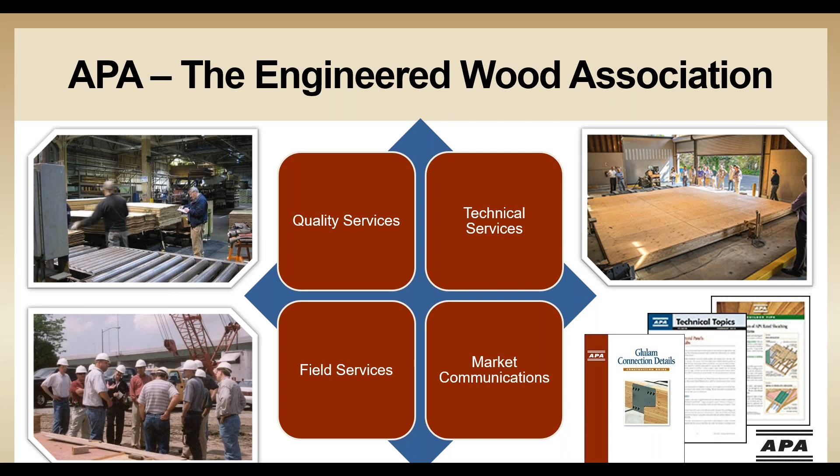Then we have Quality Services, which works with manufacturers to ensure a certified product reaches the construction site. And finally, we have Field Services, which I'm a member of. Our job in Field Services is to connect the dots from manufacturing to the end use, providing education and technical expertise to help get the job done right.

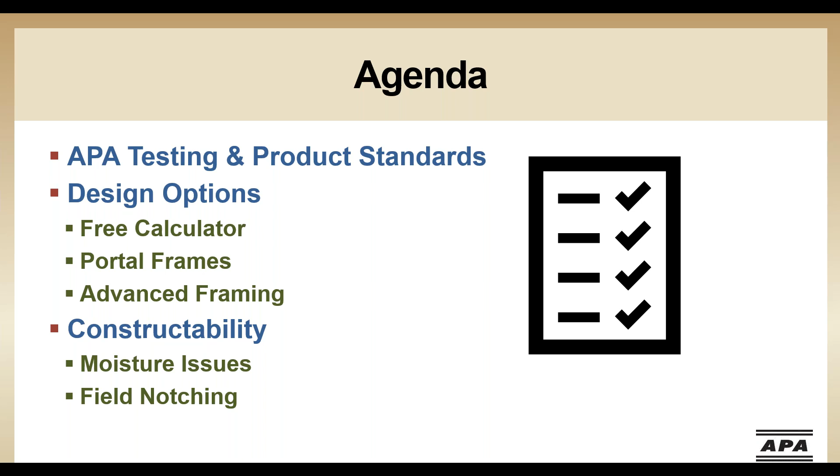Today, we're going to cover some facts and resources available through APA. We'll start by talking a little more about quality services and the testing APA does in our Tacoma lab. We'll also talk about some design tools and options that you may not be aware of, and go over some detailing to help with constructability, and review some guidelines for how to handle a trigger-happy plumber with a Sawzall. APA has a lot of free educational tools, so we'll wrap up by going through a couple different ways for you to stay up to date.

APA works in conjunction with ANSI and NIST to develop product standards for engineered wood products. If you're like I was, you reference these standards in your general notes and project specifications, but may not pay them much attention. Within APA, technical services is responsible for developing these product standards and testing products, while quality services works with member mills to ensure compliance with the standards during manufacture.

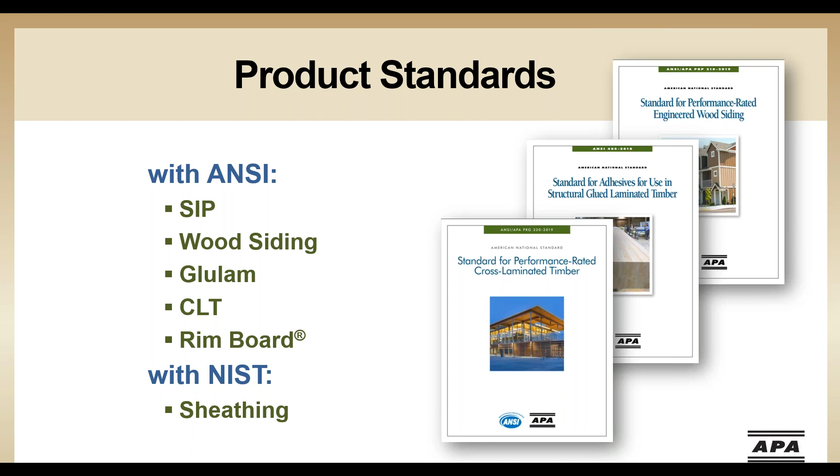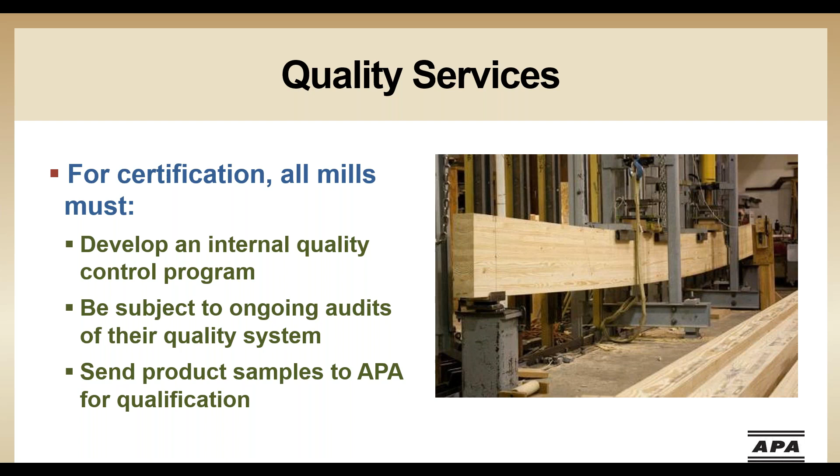The products aren't just used in the US, so APA is accredited by the Standards Council of Canada and the International Accreditation Service. Even though the Technical Service Division in Tacoma does a lot of quality testing, it isn't the only place the products get tested. The Quality Services Division works with each member mill to develop their own in-house quality assurance program, including regular testing and audits.

Part of the mill quality program includes performing their own internal inspection on a regular basis. But APA also performs third-party audits at the mill.

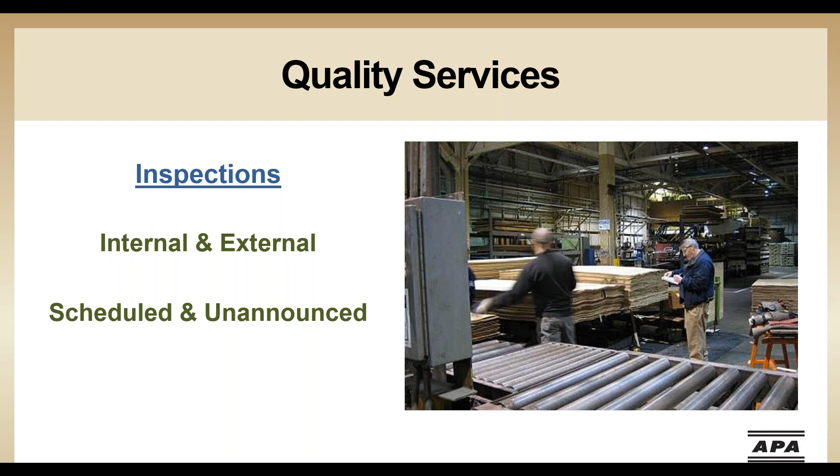I was really surprised to learn that panel products are tested quarterly in the APA Tacoma and Atlanta labs. That's a lot of sheathing tests, especially when you consider that it includes impact load tests of 300 to 400 pounds, concentrated load tests of 400 to 700 pounds spread over a 3-inch diameter disc, and a vacuum pressure soak to test the adhesive bond. One of the reasons the testing is so frequent is because of the high volume of panels produced.

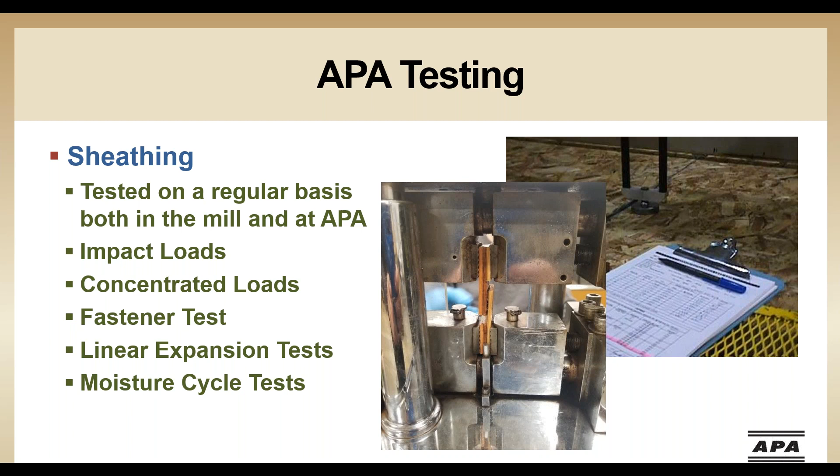I mentioned earlier that technical services backs up their guidelines with testing. APA's Technical Service Division has actually been doing research testing since 1969, but APA recently completed a lab expansion in Tacoma, and the new lab expansion allows for multi-story shear wall testing up to 30 feet tall and full-scale irregular diaphragm testing. When I was last there in January, they were working on testing a new type of shear wall assembly, which was pretty cool.

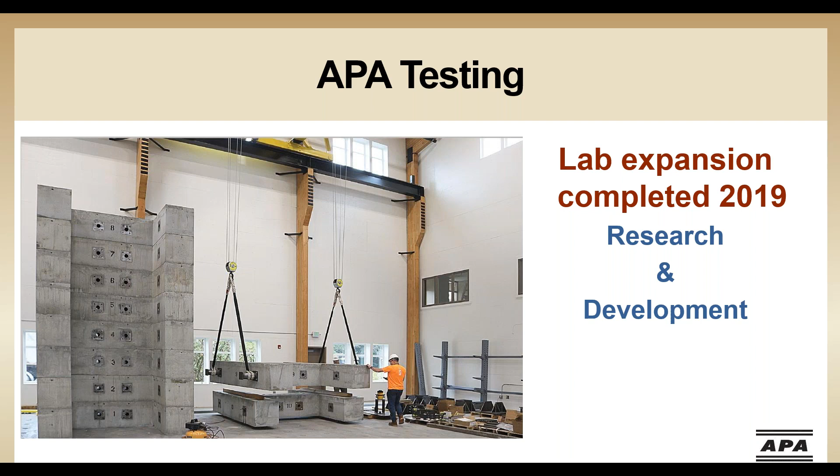APA research generally centers around wood systems innovations and building code development to advance the capabilities of wood frame construction.

Moving on to design tools, the FTAO project is an example of how field services and technical services collaborate to solve a problem identified in the field. One of the tools developed by APA is a free spreadsheet for designing force transfer around openings in shear walls. I used to do this by hand, super tedious.

Several engineers I've talked to have created their own spreadsheets, but if you haven't, this tool is ready to go for up to 3 openings and asymmetric piers. The spreadsheet is completely transparent, so you can see all the formulas, even if you can't edit them.

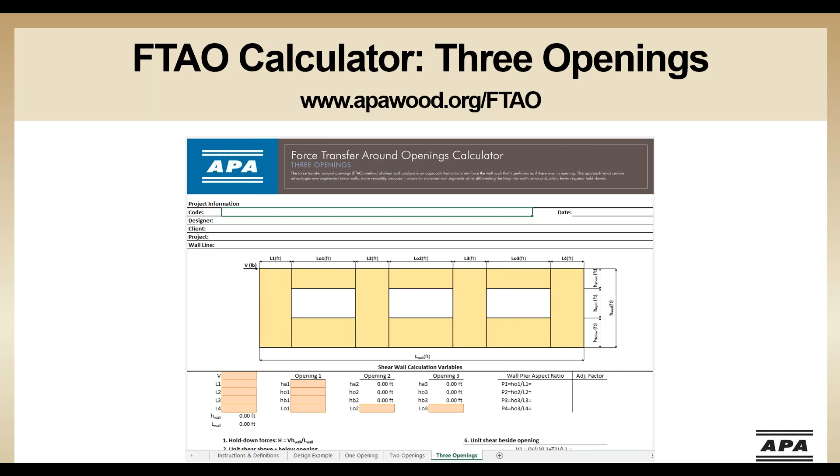The spreadsheet also has a simple design summary section with all the forces you need to pick your hardware and sheathing for your shear wall. So it has the required shear force for your sheathing and the required horizontal strap force and the maximum hold down force you need to design for. The light yellow boxes here highlight the design summary outputs provided by the calculator.

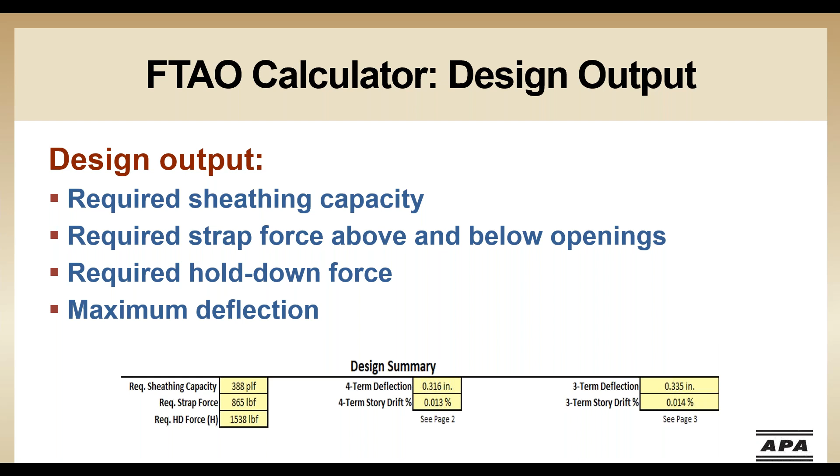The FTAO calculator also determines the shear wall deflection. The deflection is calculated using the 4-term equation seen here and the 3-term equation seen in the SDPWS. That's the wood lateral design provisions for those who are unfamiliar.

Once you've picked the sheathing and hardware to satisfy the forces in the design summary section, you can input them into this section. These sections are separate, so the calculator won't tell you if the sheathing and nailing parameters that you enter in the deflection calculation meet the required sheathing capacity calculated above. So the engineer still needs to check that themselves.

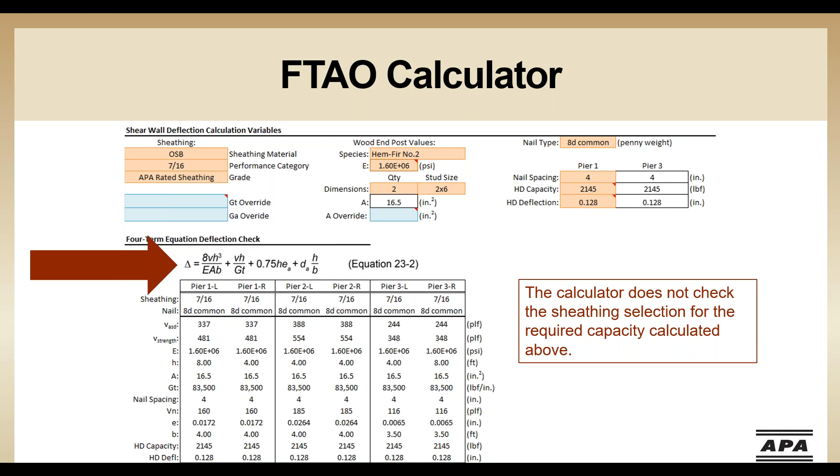But the best part about this calculator is the analysis results fit on 3 pages, and they can be printed directly from Excel or saved as a PDF file, so they're ready to be included in that final calculation package. If you're new to this calculator, we have an intro webinar on our website that goes pretty in depth.

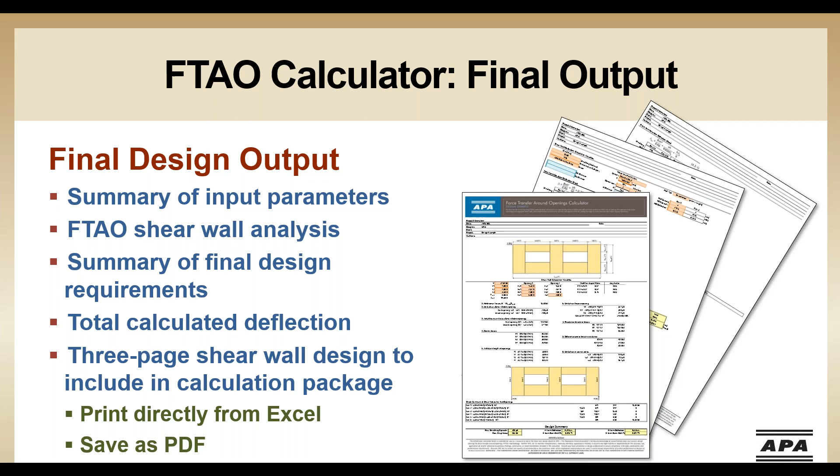Portal frames are another design option that I hadn't previously used in design. I didn't live under a rock, so I'd seen the proprietary shear walls before joining APA. These products were ideal for that front wall of the garage.

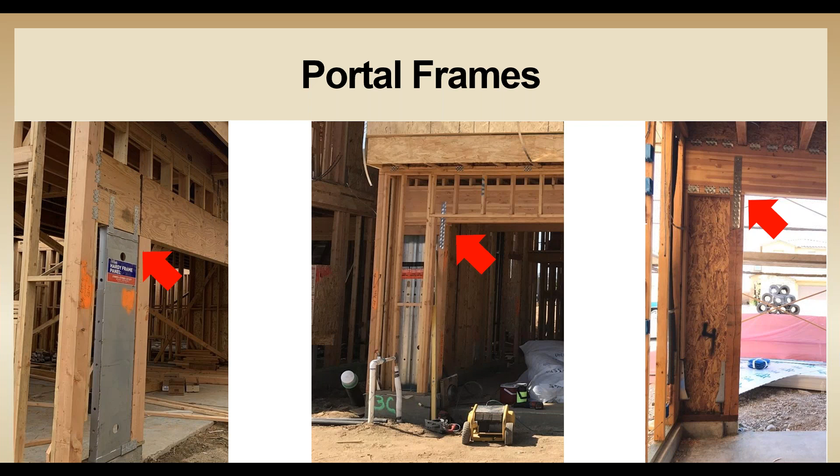I hadn't done a lot of residential design though, so I didn't realize that in the residential sector, there's also a site-built option, which is shown on the right. If you detail it correctly, the portal frame acts kind of like a wood moment frame. And the capacity of these walls is based entirely on testing.

If you're using the residential code, the portal frame is a great way to add lateral capacity at garage openings. Because the IRC is a prescriptive code, you have to build it exactly the way it's shown in the code. This requires careful attention from your framer. So there's 4 elements you should note in this detail.

Number 1 is the header, which extends over the top of the wall and is fastened to the king stud. Number 2 is the strap, installed vertically next to the opening on the opposite side from the sheathing. So if you're sheathing the exterior of your wall, the strap goes on the interior face. Number 3 is the grid of 16-penny sinker nails in a 3-inch on center pattern at the header.

Number 4 is the nailing. 3-inch on center nailing is required at each panel edge and each framing member.

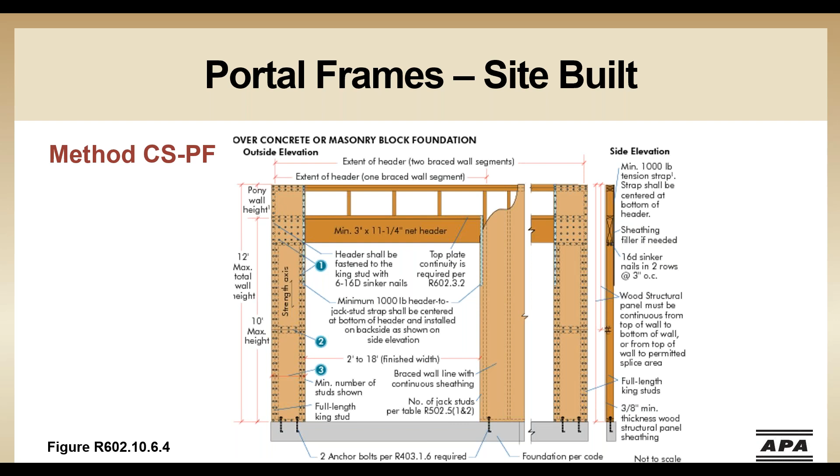APA also has a tech topic on portal frames if you're looking to use this on an engineered wall line. The benefit here is adding lateral capacity at a wall that otherwise might not meet the aspect ratio requirements, while still using regular materials and building it on site.

The third design option we're going to talk about today is advanced framing. When I first saw this publication, I thought, advanced? Why are we making it so complicated? This is really about approaching some typical details in a more thoughtful, holistic way.

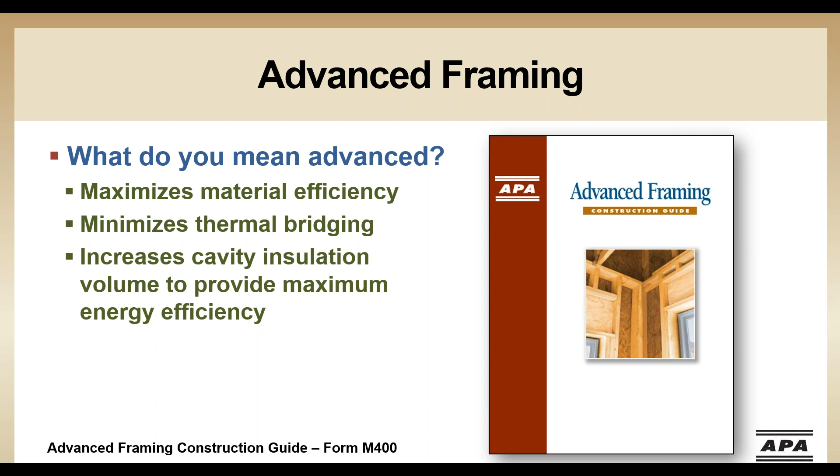Here, we're trying to maximize our envelope energy efficiency, as well as take full advantage of every piece of structure. As an engineer, I typically didn't feel like I had a lot to do with energy performance, but there are several different things that an engineer can do to help. I've highlighted just a few here.

So insulating our exterior headers is one, increasing the wall cavity size, or considering insulation when framing corners and wall intersections. These are all pieces that can help your building be more efficient. You can pick and choose which details will work best for your project.

For example, you may not be ready to rely on your framer to align the framing so you can use a single top plate, but you may be ready to improve your envelope performance by using insulated headers and corners. Out here in California, the top plates are often used as collectors, so the double top plate is doing a lot more work here than in other areas of the country.

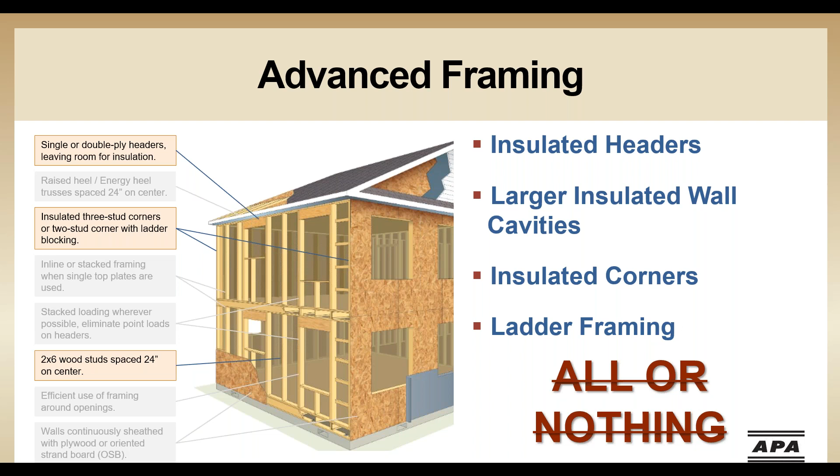Part of improving envelope performance is making sure that the corners are insulated. I was really used to the detail on the right. Most of the details I've seen go the extra step to consider gyp attachment, but don't necessarily consider insulation. Since the insulation is typically installed after the framing has been inspected, details like the one on the right make it impossible to insulate the corner.

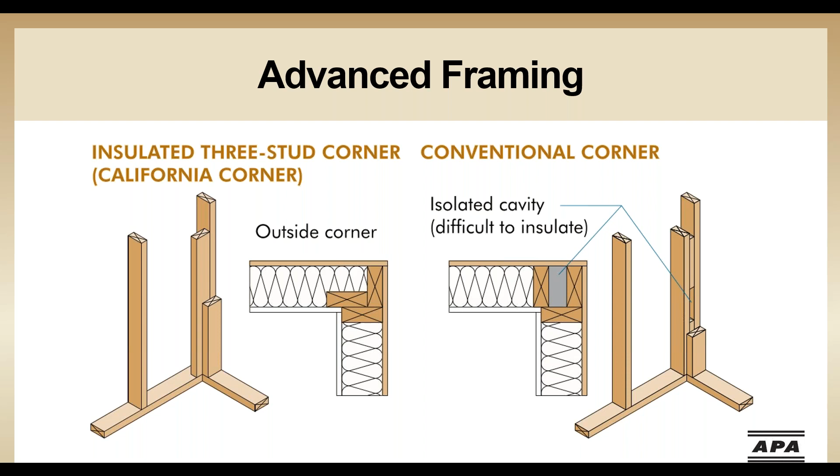If we approach this detail a little more thoughtfully, we can help provide a better insulated building. This is another way to get that gyp attachment without preventing insulation at the corner.

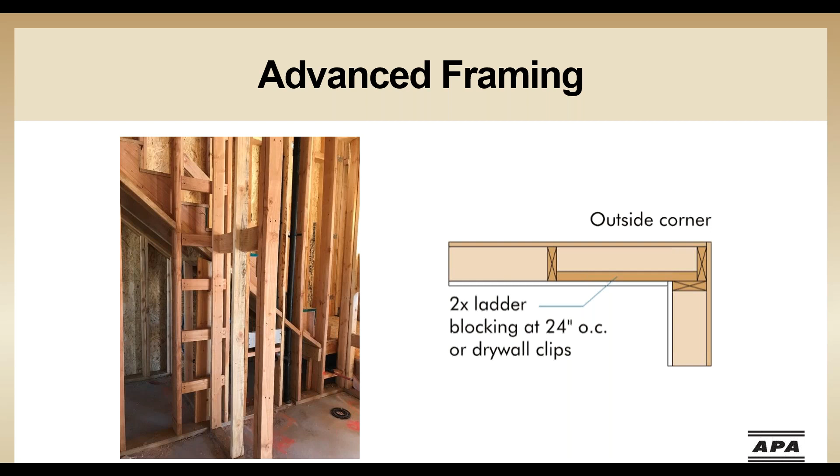Ladder framing is something I have seen often in specific parts of the Southwest. The detail can be used at most wall intersections, so at an interior wall as shown on the left, or an exterior wall as shown on the right. This is an alternative to the 3-stud California corner shown on the previous slide.

While I had never thought about insulation very much, I used to think I had a pretty good handle on framing issues. I think most of us understand that construction sites get wet. Typically, as engineers, we worry more about the in-service moisture condition and less about temporary conditions during construction.

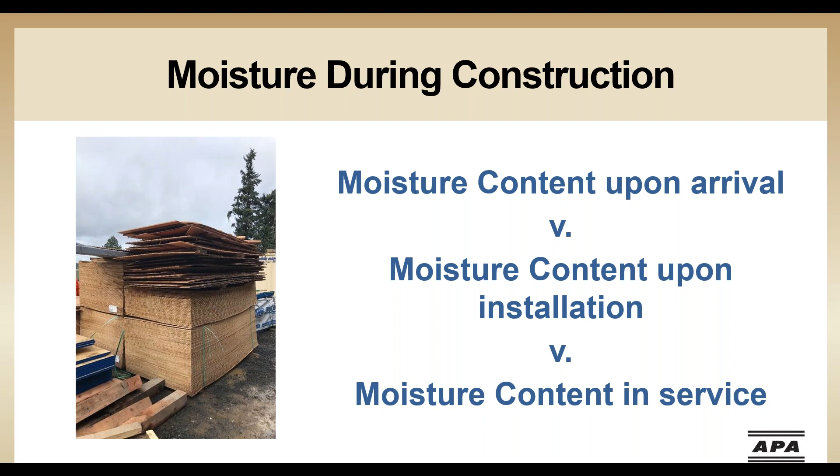I'm sure most of you also realize that wood naturally swells when it gets wet. This can be a big deal on a construction site, especially since the building materials are often stored outside and they're not always protected from the elements.

APA-rated panels are required to have a moisture content under 16% when leaving the mill. Typically, the actual moisture content at the time of manufacture is well under 10%. Ideally, you let the panel acclimate before installing, but construction schedules often don't allow for this.

As a specifier, there's only so much we can control. Weather, obviously, isn't one of them. We can control the edge nailing and the panel thickness. The thicker the panel, the stronger it is out of plane.

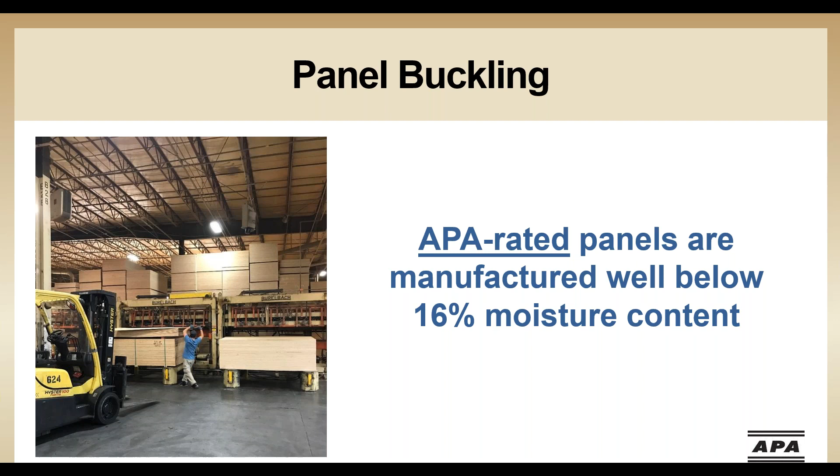Unfortunately, in this case, the panel growth was restrained by the 2-inch edge nailing. Opting for a thicker panel and a larger nail spacing could have saved the contractor and the project a lot of time.

As a designer, sometimes we focus on economizing certain aspects of the project and miss the possible implications on construction. So before specifying the 2-inch edge nailing, maybe check to see if you can use a thicker panel with 4-inch edge nailing. It may save a lot of headaches later.

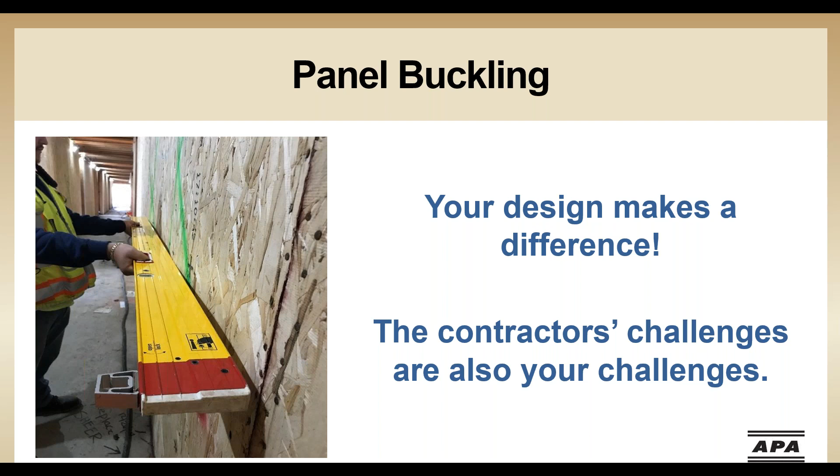APA has several documents about panel buckling.

If you're anticipating a wet or humid construction site, there are a few different ways each team member can deal with this issue. As an engineer, you can make sure that the nailing you specify still allows for a little panel expansion, or use a thicker panel that will be more resistant to buckling.

As a builder, you can get the panels on site early to acclimate before they're installed. And as a framer, you can field nail the panels with 1/8 inch gaps and then return to finish the nailing right before enclosing a wall.

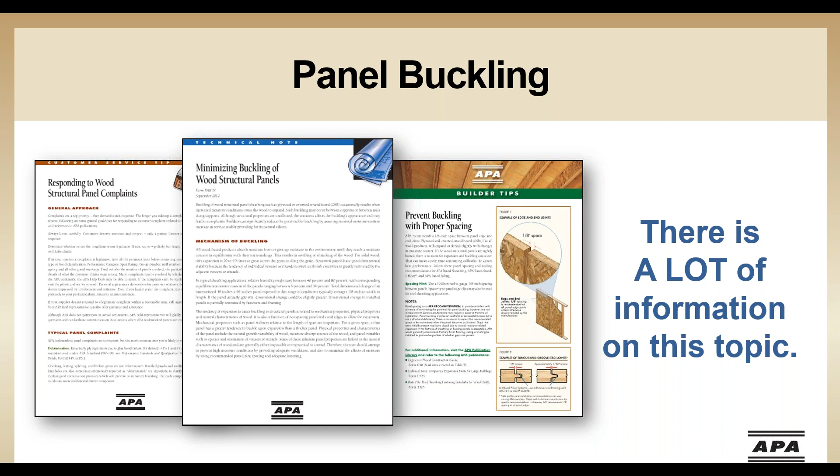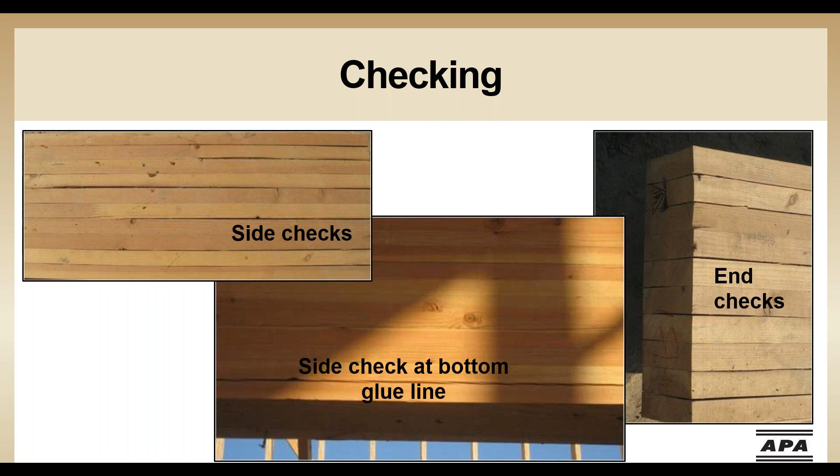The difference between delamination and checking is the wood fiber pull. Delamination is when the adhesive fails. Seasoning checks mean the wood fibers are pulling apart.

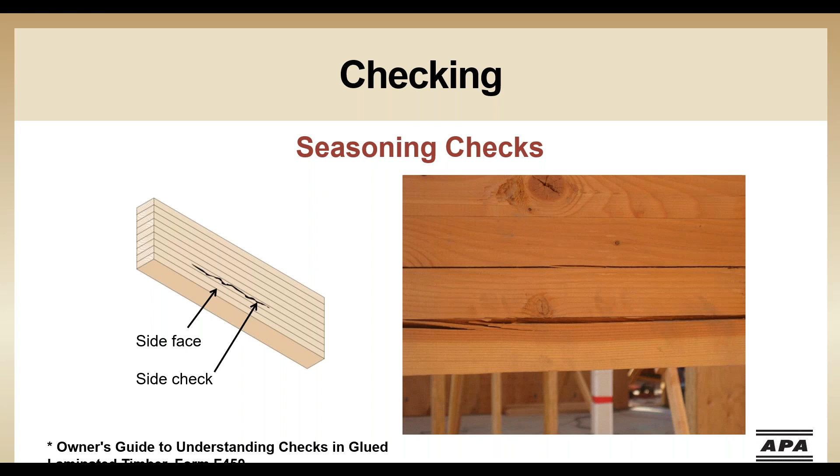This is an example of a side check where the opening is parallel along the side face of the member. If a side check is no greater than 1/3 of the width and 1/3 of the length, you can relax. There shouldn't be a structural concern.

APA has a handy flow chart in the owner's guide to understanding checks in glued laminated timber, and this will help you determine if you need to be worried. If the checks are really large, they can become a structural issue.

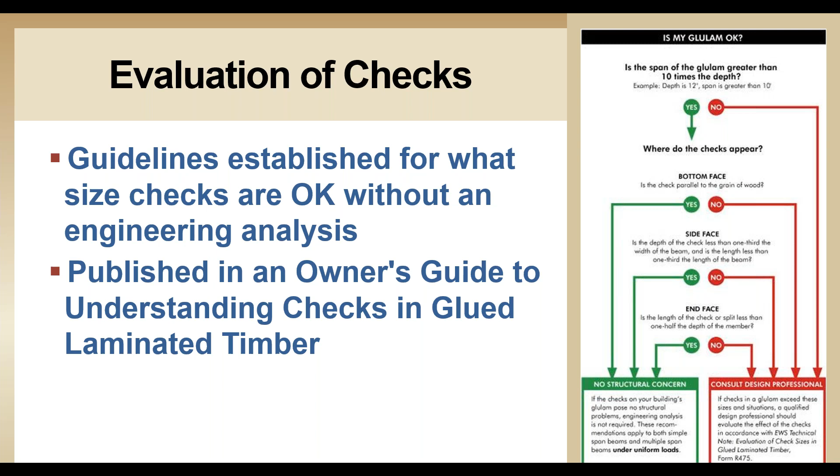I definitely saw some fairly large seasoning checks in a couple of the older wood buildings I worked on previous to joining APA, and I wish I'd had this flow chart handy.

If the checking of the beams becomes a concern, take a look at this technical note on the evaluation of check size in glue laminated timber beams for some extra information.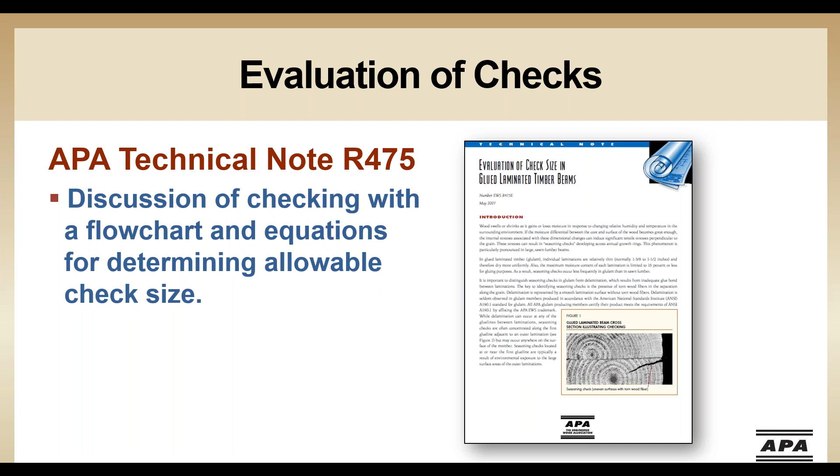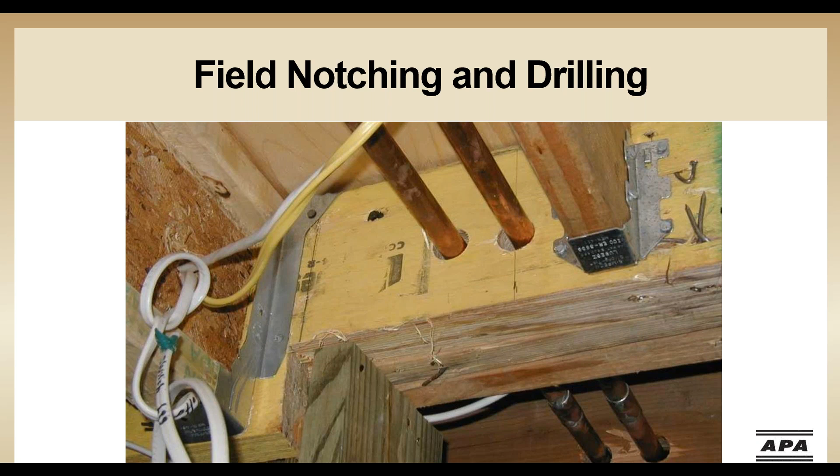Now, I'm sure you've all run into a drill happy MEP installer at some point. Sometimes you can help by giving the contractor guidelines up front, but sometimes you don't find out until after the deed is done.

For simple span conditions, APA has some helpful graphics showing the areas where the contractor can drill within limits. For glulams, the horizontal holes are limited to one tenth of the depth of the beam or 1 lam depth up to 1.5 inches for glulam, and as long as it's in the center half of the span.

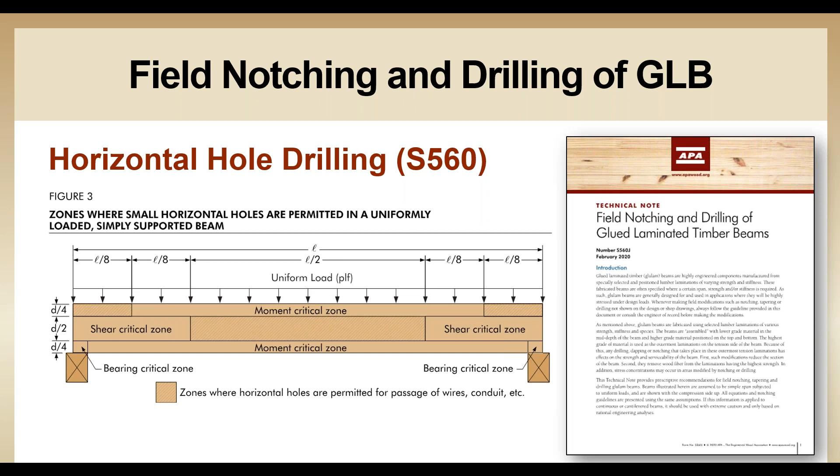They also have a similar document for LVL where they're limiting the hole diameter to 3/4 of an inch for 3.5 inch LVL, up to 1.5 inches for 7.25 inch LVL, and all the way up to 2 inches for any deeper LVL. But these are limited to the middle third of the span.

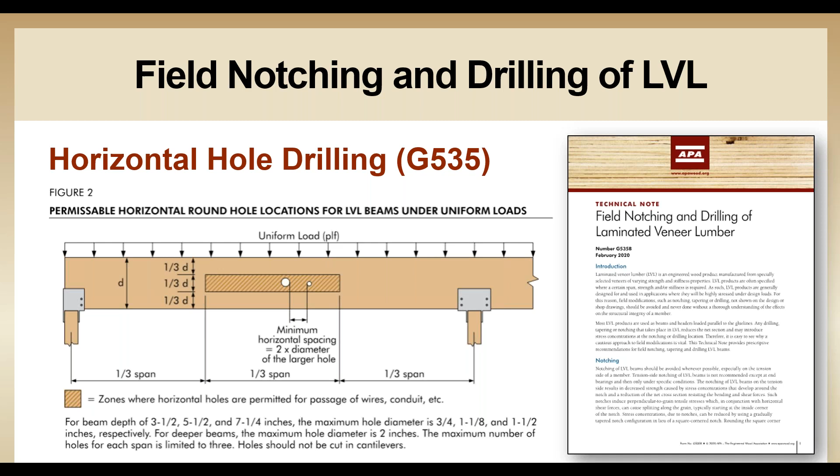These guides also cover vertical holes. I've seen this a few times, but they've all been for electrical conduit, so not very large diameter holes typically. This is the strength reduction equation if this comes up on your project.

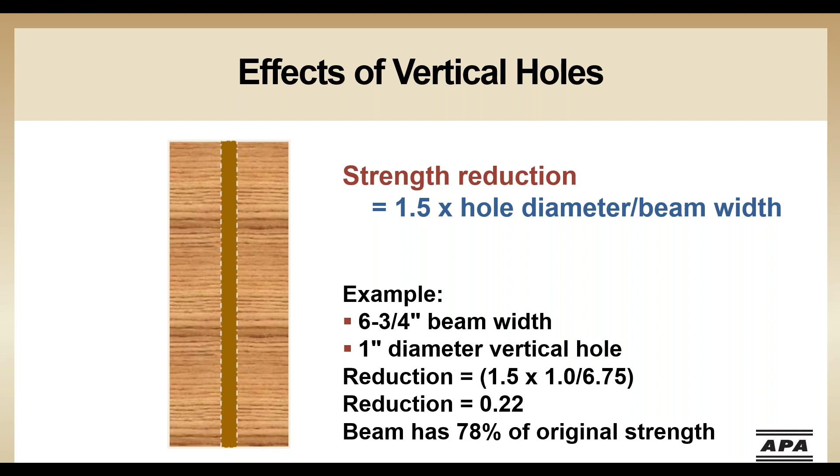This equation applies to glulam and LVL.

Sometimes there isn't really any other place to run the MEP, in which case, hopefully, you get to help locate the holes ahead of time.

I came really close to doing this on the Puppy Birthing Center project in San Rafael because they had a very robust HVAC system and a very limited ceiling space.

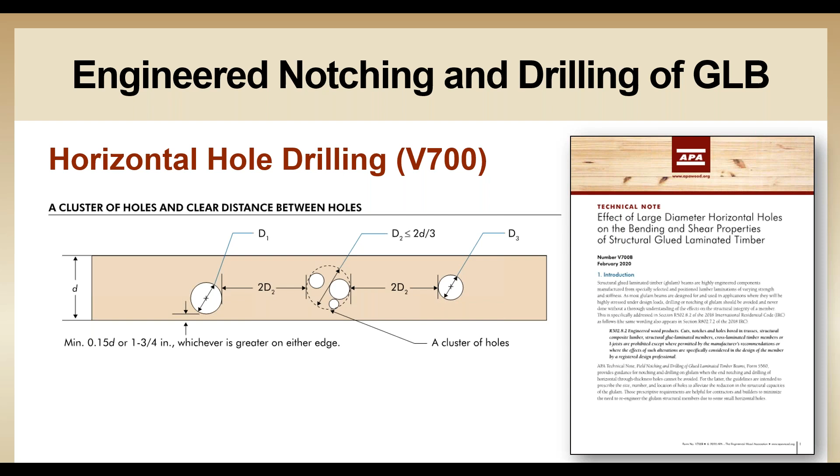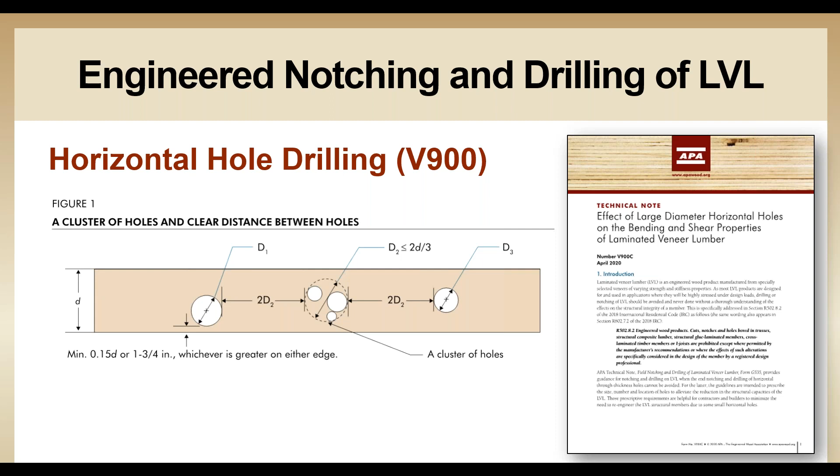APA recently released guidelines for larger holes, including how to calculate the strength reduction. This one's for glulam beams, and they have another one for LVL. These are both specifically for horizontally drilled holes.

APA has a ton of free resources. While I knew about some before I joined APA, there were quite a few I wish I had known about.

The website's one of the most powerful tools. Not only can you find and download publications, but this is also where you can see upcoming webinars and past webinars on several of the topics we touched on today.

There's also a link to a full CAD library with helpful details, like those used for advanced framing and portal frames, which we talked about earlier.